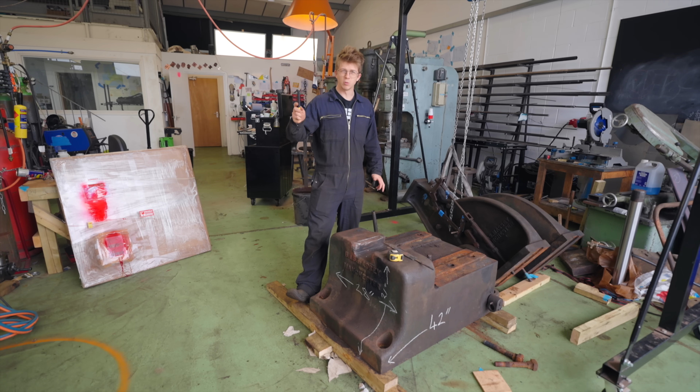Welcome back, episode 7, restoring the 1915 Massey steam hammer. In the last episode, we got it disassembled, so we can access this curious little problem that needs a lot of work on the anvil. We also received this package.

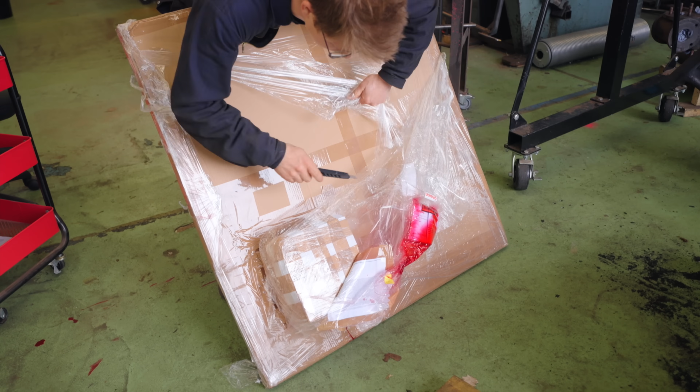Ba-bam! It's so slippery. I can't grip it to pull it up. Woo! Oh no, it's broken. This is graphite sheet. Look at that, you can just rip it apart. This is meant to be our gasket material, but who knows if it's strong enough. I need to put this somewhere safe.

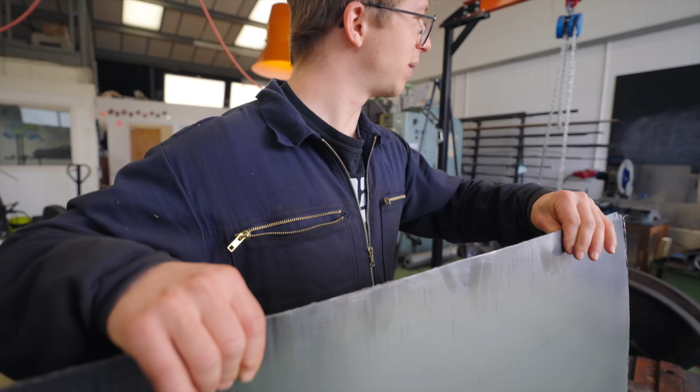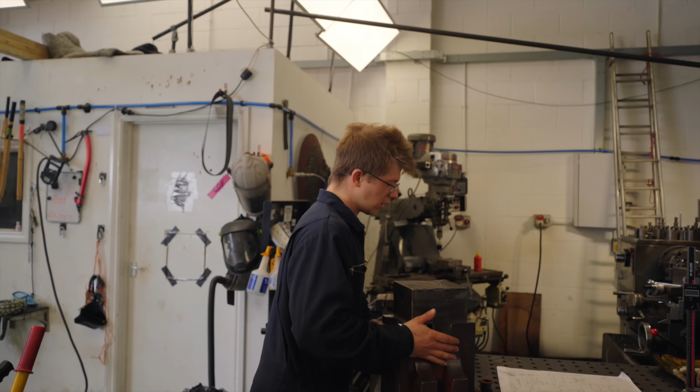The stuff that's more relevant to the last episode, however. Oh yeah. Look at that. That is 7 meters more than we need of 3/4 inch square graphite rope for the stuffing box. Oh, but we can put all that to the side because there's still work to do on our top die. So it's to the mill.

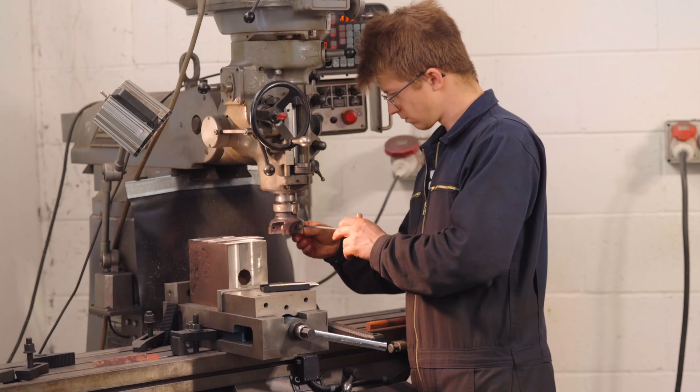That is 5 of the 6 sides of the die done. Cleaned up and made a lot neater. Now, the keen-eyed amongst you might have noticed something different about the machining on this last side. You might have noticed that everything looked a little bit less fireworky.

When I've been cutting high-carbon steel with the face mill in the Bridgeport, you have just seen showers of sparks go absolutely everywhere. Because for whatever reason, I seem to think that it was just the high-carbon steel that was making that happen, and there was nothing I could do about it. Turns out, for the first time ever, I tried experimenting with cutting at significantly slower RPMs.

Now, I'm quite certain many of you have spent many, many years screaming internally that I never tried this before, but I switched from the high gear to the low gear. I went from cutting, usually with this cutter, at about 700, 800 RPM, to cutting at 270 RPM. And the result is, we took beautiful chips that were not sparking.

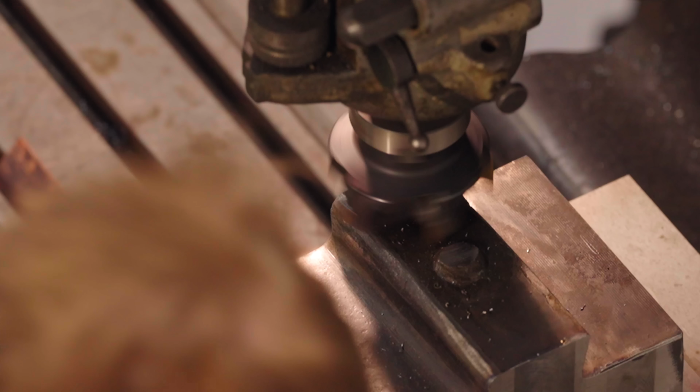The inserts on the face mill are looking in pretty good shape. The surface finish on the die is much nicer. And it didn't take any more time. I was able to take the same depth of cut, the same feed rate. All I did was just reduce the RPM, and everything was better.

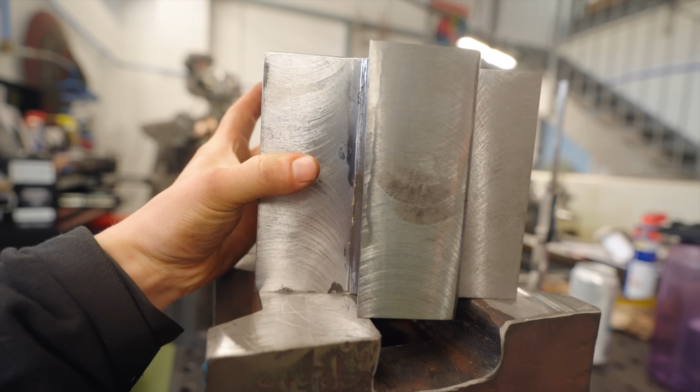Alrighty, let's have a look at what we got. As you can see, the underneath of the die has now been touched. This means that it is now square, but this is where things are about to get a little bit tricky. Unsurprisingly, adjusting anything has knock-on effects. I've made sure that we're contacting here on our freshly milled surface.

To do that, we had to take a disproportional amount of material off this face as it compares to these two faces. But you'll see we have a little radius in here, corresponding radius on the male part of the die. Well, having now adjusted things and moved things around, stuff ain't fitting. If I try and squeeze that die up against the edge, it lifts the block up. No good. This little sharp edge in there, also no good. Same deal on the other side, at least only a key has to go here.

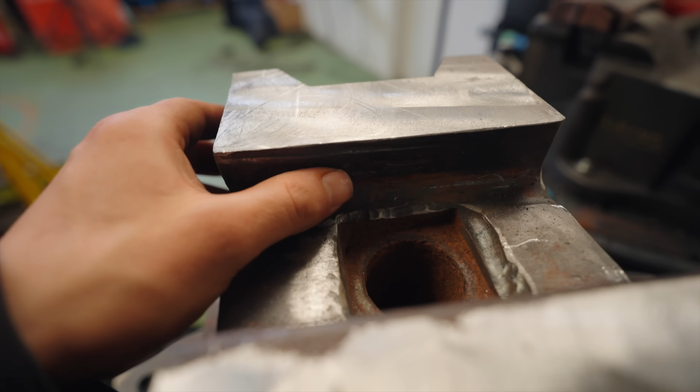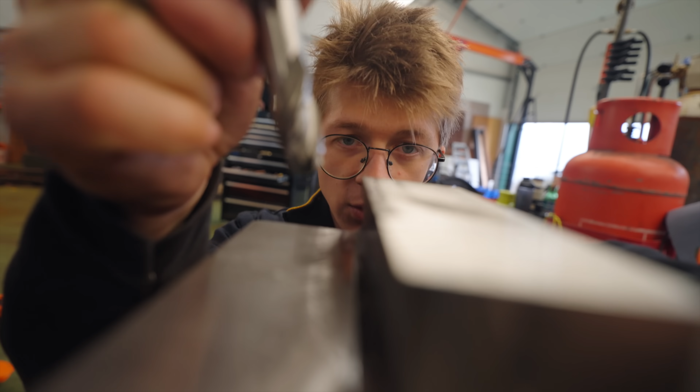Regardless, it's no good. About to sound like a broken record here, but the dovetail in the ram itself is also no bloody good. But I went ahead and preemptively ordered some end mills, some fairly chunky ball end mills, and the hope is that we can use these to recut the actual dovetails themselves. Get them, skook them.

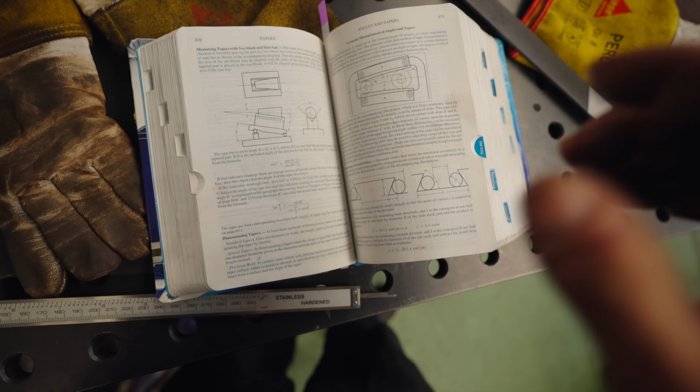Now remember, one side of our dovetail is parallel to the die block. Another side is tapered, and so this is surely going to be a wonderfully confusing situation. A number of you have suggested that I get a copy of this, Machinery's Handbook. Well, I've actually had that for like 8 or 9 years. Somebody once very kindly gave it to me. But you see, it's only helpful if you know how to read. And furthermore, the amount of detail written about dovetails, as far as I can see, is only about measuring them.

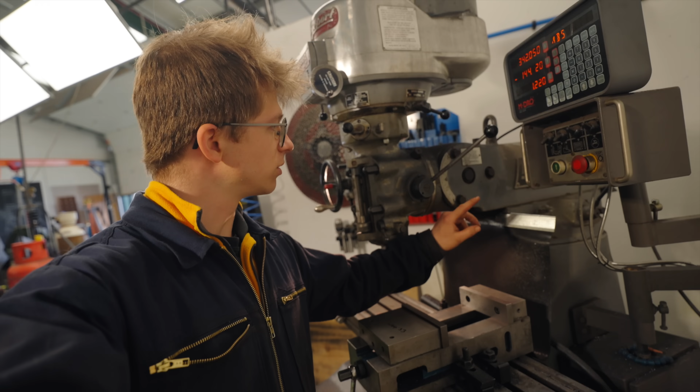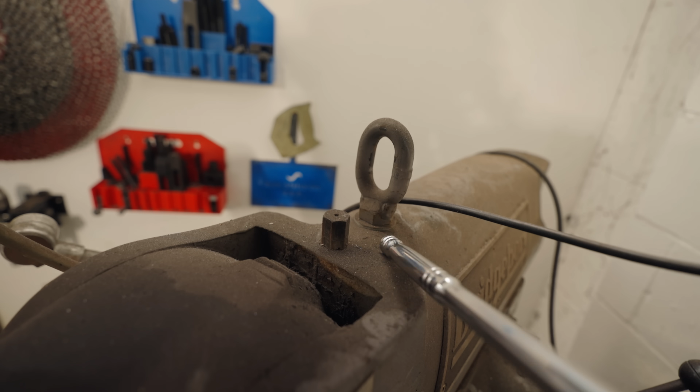But I'm at least gonna start like this. The side that's parallel, we're gonna tackle that first in the mill. And we're going to achieve our angles by nodding the head. We use these adjustment points right here, nod it up and down, and so let's see how that turns out. Wow, I did that up tight. Then back here, I got a little worm screw. I should probably be careful to not use terminology I don't exactly know. There's a thing that we twist, and we can twist that to lower the head.

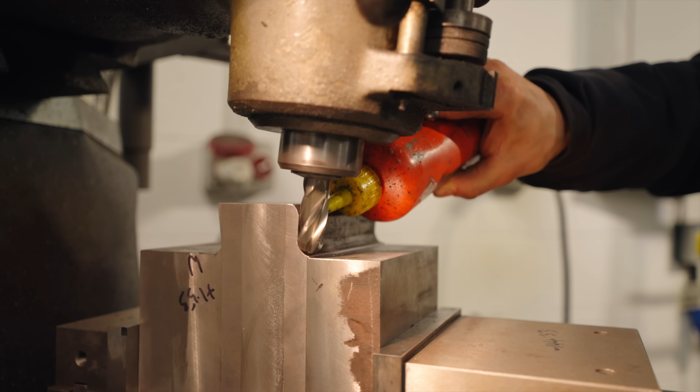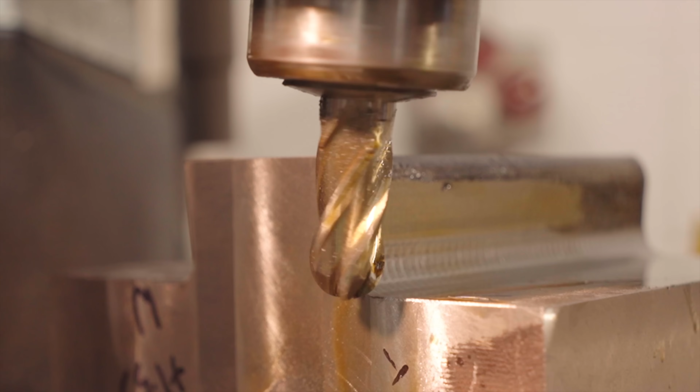I'm really hoping that this little experience teaches me a lot of useful information for when it comes to actually having to manufacture my own dies. We are definitely going to need to make the bottom die for the anvil block when we get to it. The cut is fairly central to the dovetail, which makes me feel the angle is probably pretty close. Oh yeah. That is the parallel side done.

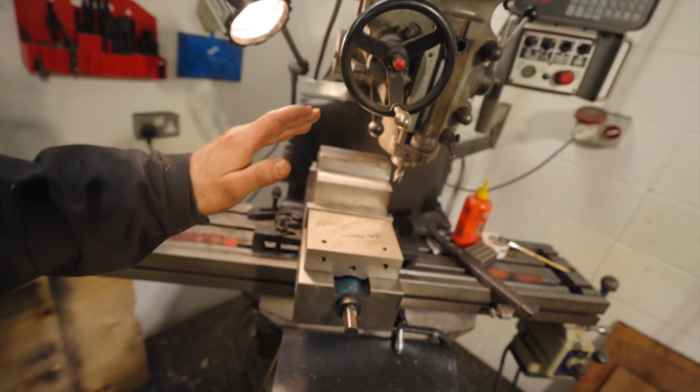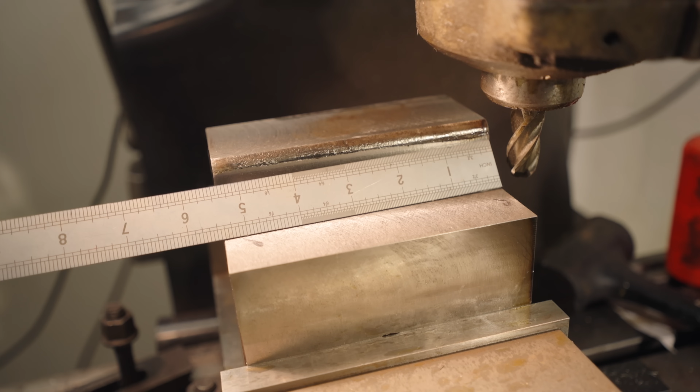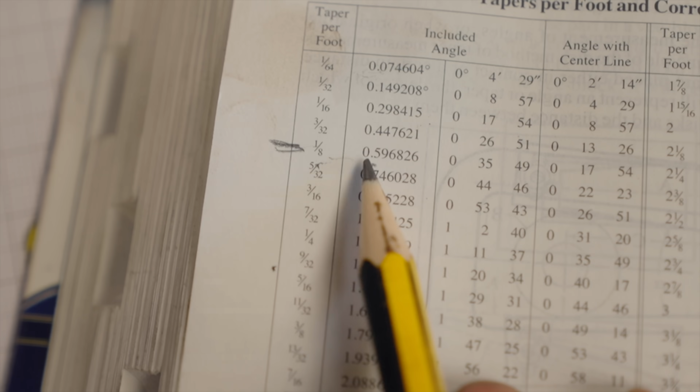Now I need to flip it, but we have to get the correct taper on it. Now what I did is I preemptively measured the offset in dimensions. So I know 1.5 millimeters over the length of this die is as much as it needs to be twisted. But check this out. I saw that the page after our little dovetail page is conveniently tapers per foot and corresponding angles. This thing's a little under 6 inches long. So multiply that by 2, 3.06 millimeters. Now what is that number close to? That is close to 1/8 of an inch. 1/8 of an inch taper per foot, about 0.6 degrees.

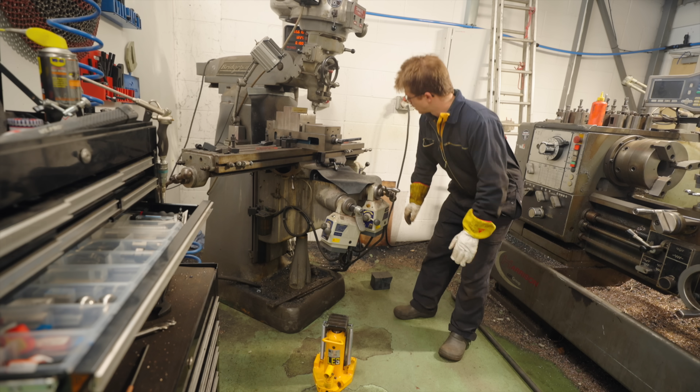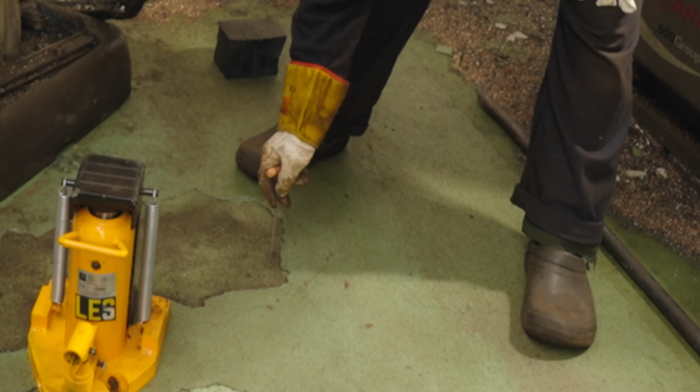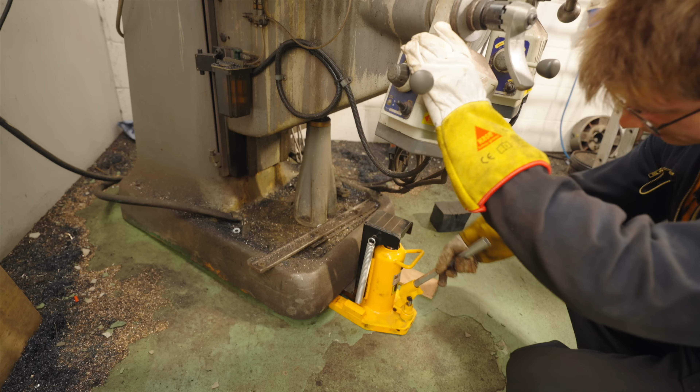I did notice something a little bit concerning earlier that I've been trying to deal with, which is this mill has a little bit of a rock to it. Yeah, look at that. The mill can wobble, not good. This concrete floor right here has like an epoxy coating and it just falls apart, like it's awful. And I'm a bit concerned with the combination of that funny floor and all the chips and crud accumulated under here to make for a not very level footing. We've got to do something about that. Whoa, it's like lifted up completely.

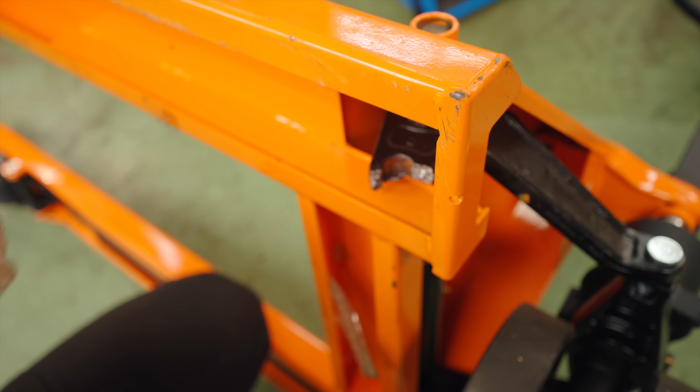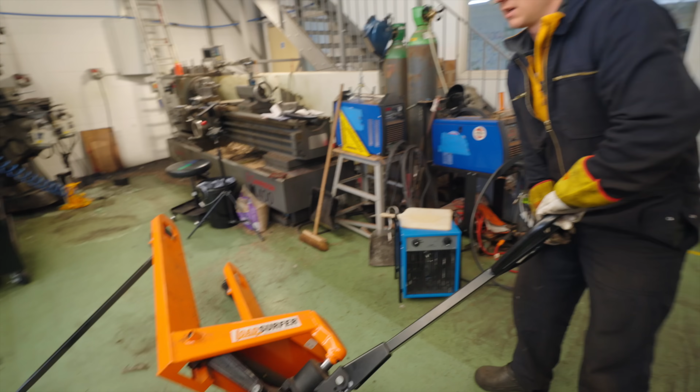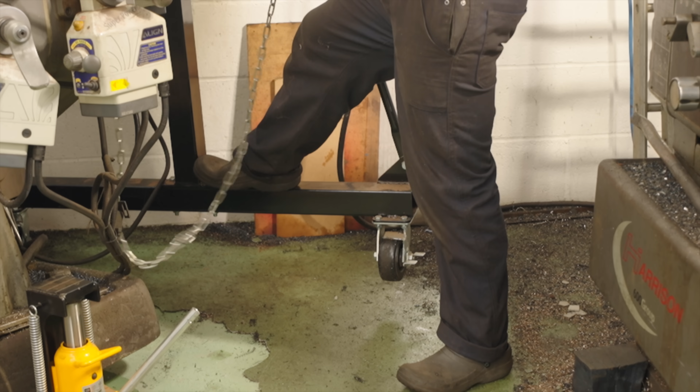What is putting 1 foot on there gonna do? Thank goodness I'm an engineer. Bro, you drove a steam engine for 1 day. You can hardly call yourself an engineer. I drove it a total of half a mile.

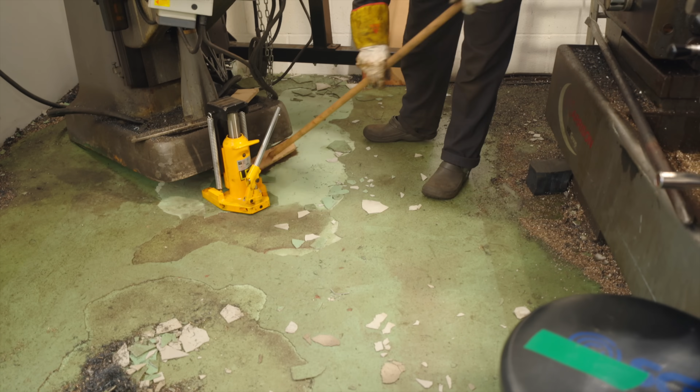Okay, I chipped out a lot, and I've hopefully got nothing else stuck under there. I'm gonna make some little wood wedges to go into the front. All right, slight tangent. Actually, you know what? Let's do this in a minute. What?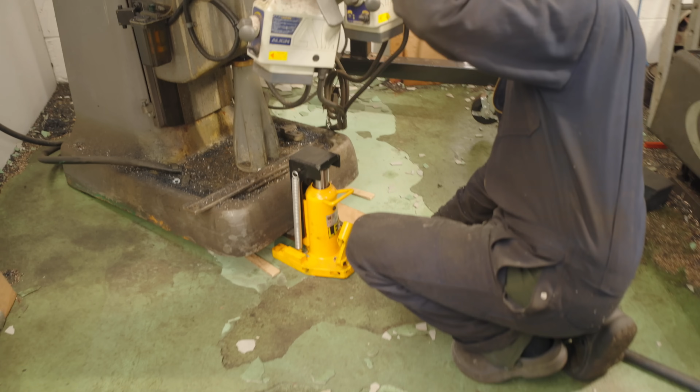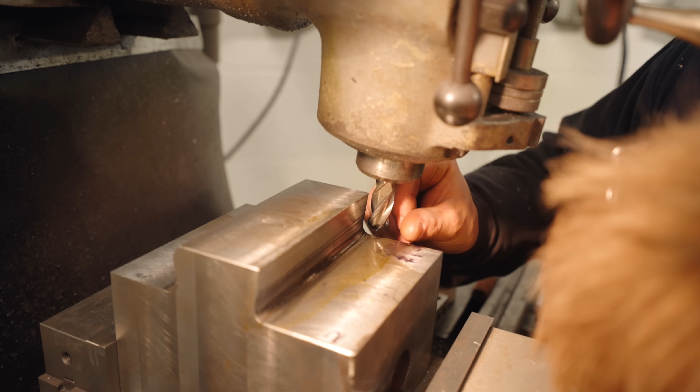Wow, that's so much more rigid than it was. Definitely won't have to stop and fix this in like 3 days' time. Ow! Oh yoy, 2 passes with the brand new cutter and it's already ruined. I think we must have hit a pocket of work-hardened steel.

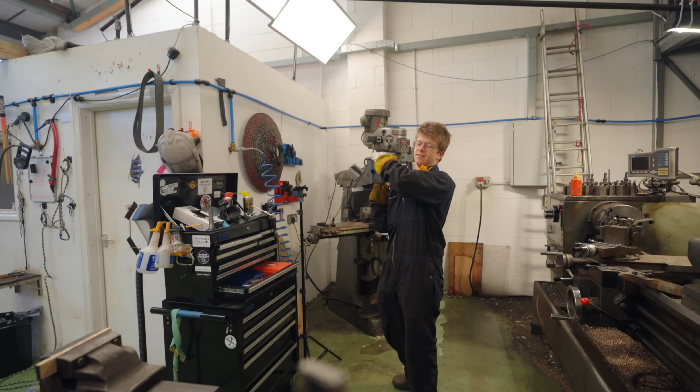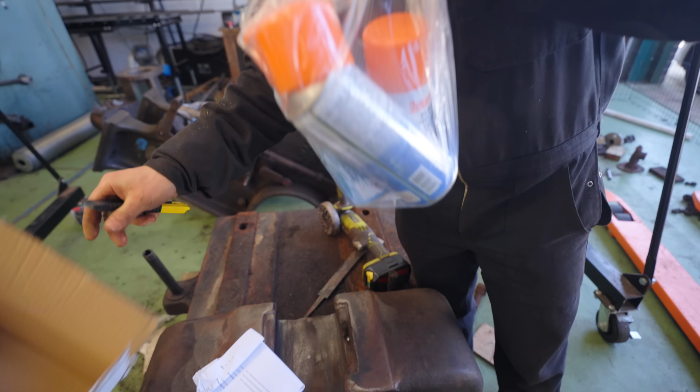It's slowly getting lighter every time we move it. This die, I think we're kind of done machining on. Question is, what do we do next? Ooh, I had a tangent to talk about. Right, time for a short tangent, and that is to find out if we've got crack. Boom! This is meant to be a crack detector.

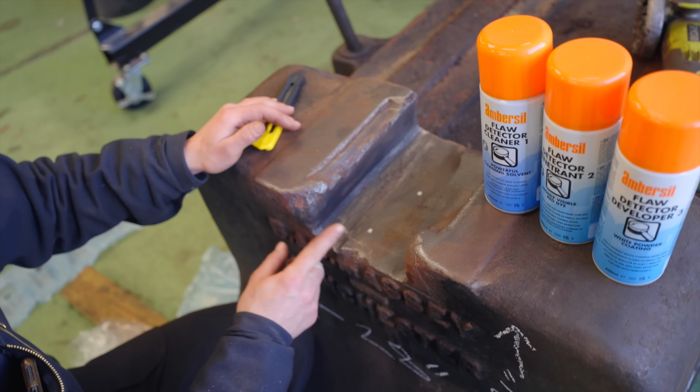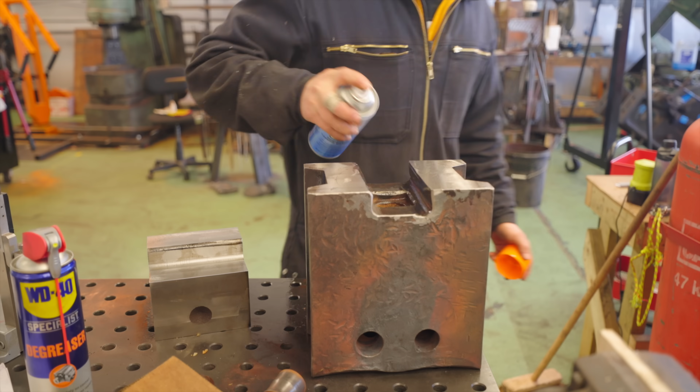John at Massey Forging recommended that I check and see if any of this stuff is cracked, because that would be really bad. And considering the abuse that this anvil has seen in its dovetail area, I think that's a pretty good shout. So let's see how it works. Flushes out soiling and leaves surfaces ready for penetrant 2 and developer 3. Something tells me this probably wanted clean metal, not like rusted, oil-infested crud, so this might be a waste of time. Flaw detector penetrant 2 penetrates defects and cracks.

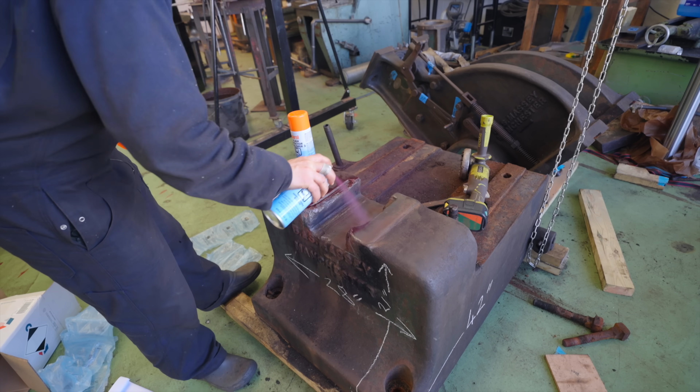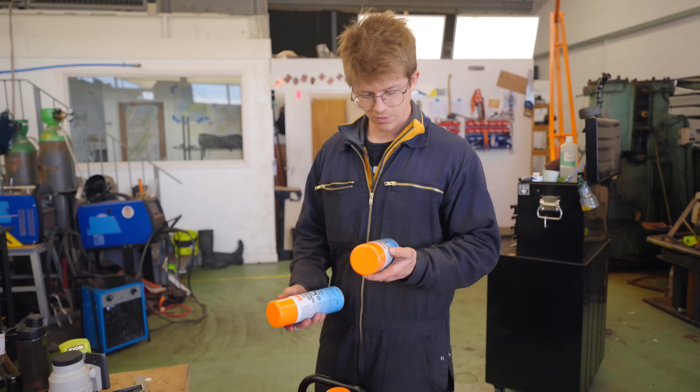Liquid penetrant applied. It needs to soak in as short as 5 minutes up to 30 or 60 minutes. We will wait some time. And then I think we use the developer, number 3. Tell you what, looking at that, it does make me think somebody's done a weld repair on this at some point. Maybe that is why we were destroying the high-speed steel end mill. Now we detect.

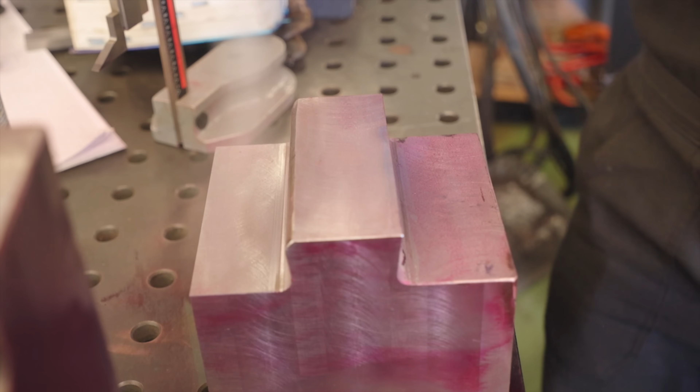I think this is meant to tell us something, but I'm not exactly sure what. I think it's meant to like highlight any remnant red. That's an exaggerated example of it. Like there's definitely red stuff stuck in there that didn't get wiped off. Oh yeah, and look, it showed that little impurity right there. Definitely works better on these milled surfaces. It looks like this handle has got the plague. I don't think I'm going to learn much until we are down to true material. So on that note, let's see what we can do about this bottom dovetail.

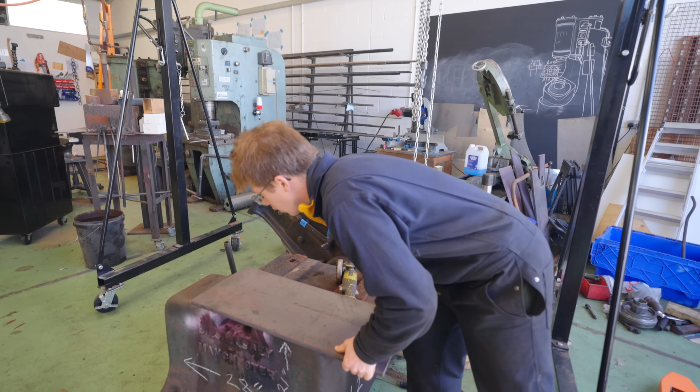So though we do have some awesome leads on this thing getting machined, there's that little part of me, that irresponsible part of me, that just thinks about how cool it would be if we were able to do it right here, with nowhere near the tools required to make this happen. I don't think it's impossible, as you guys said in the comments, and as people have reached out to me with some really good ideas on how to get this done, the impossible starts to seem just a little bit possible. Angle grinder won't go down far enough.

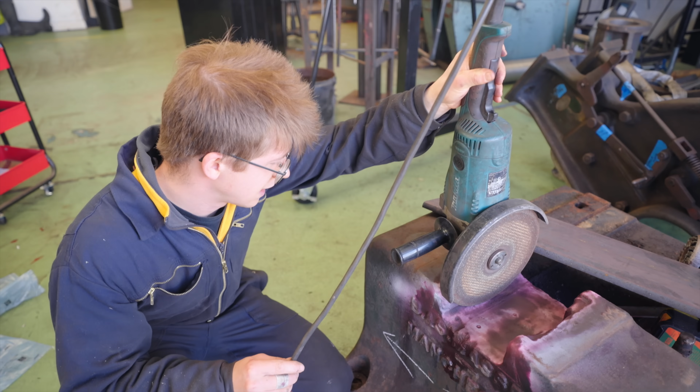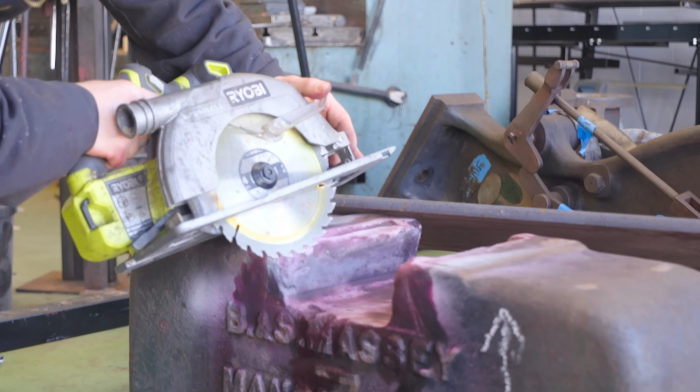It could go out this way, but then we'd have to flip everything to do the other half. That's not going to be deep enough, is it? Not with this blade. There's also a wood cutting blade. What if they had an angle grinding blade on it? Go buy a massive circular saw. Then see if we either put an angle grinding blade on it or use the components, retrofit this stuff onto an angle grinding blade. I'm gonna go buy one of these. I bought two things in case one is more suitable than the other.

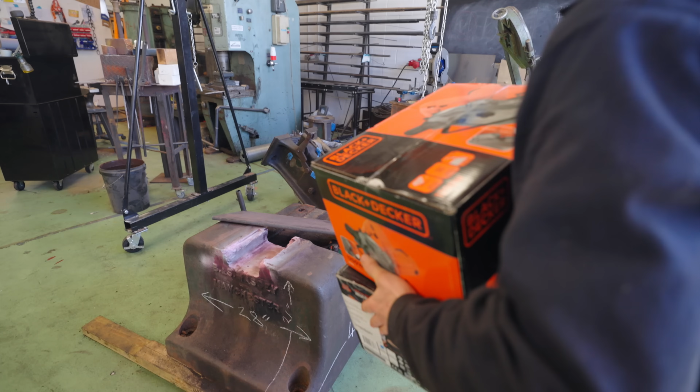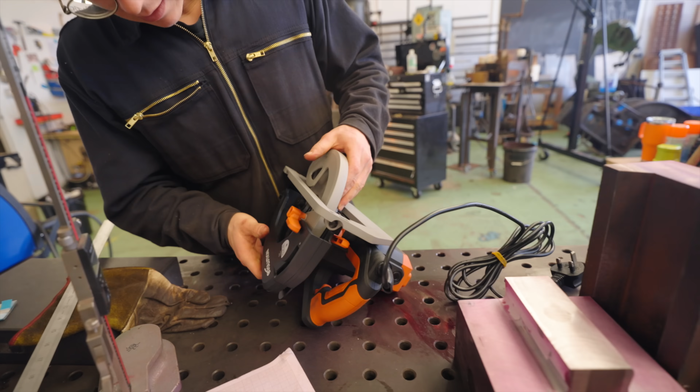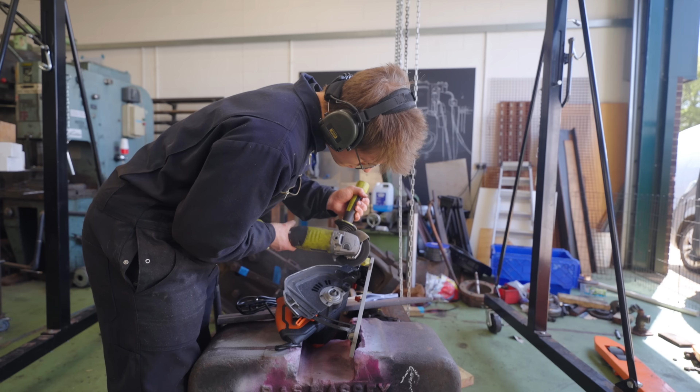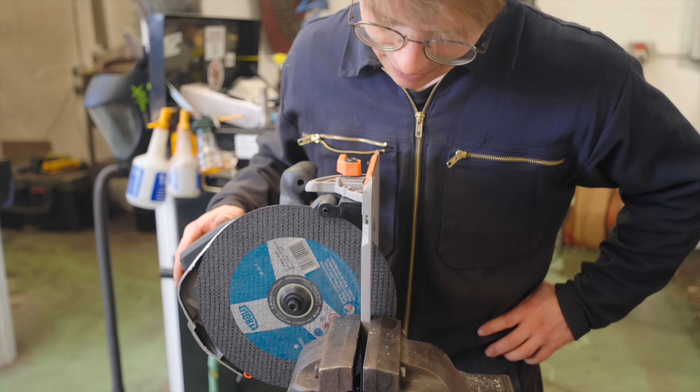Jamie, imagine how naughty. No chance. Oh, I tell you what, that does look a lot more robust though. Let's start disassembling, shall we? So close. Will it explode? I feel like horizontal, like at abdomen level, is probably not the best way, actually. I think vertically in a straight line is better. There's no way I'm using this. No chance. There was never any chance that we were going to use this. This is just ridiculous.

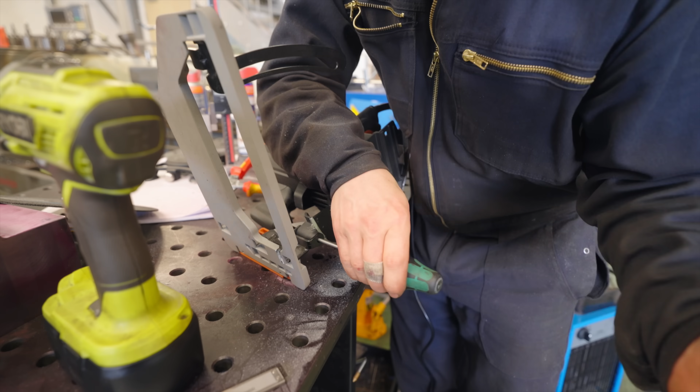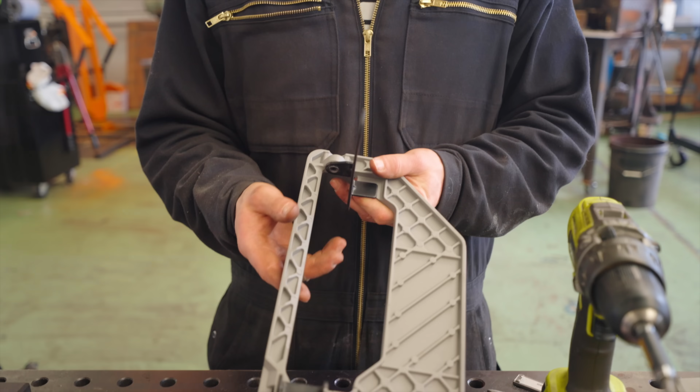Then we can just return this. I'm joking. Now, how in the heck are you going to attach that to an angle grinder? I don't have any idea, Jamie. This might have been an entire waste of time. Yeah, so this also might not work for a similar reason as the last one. So this thing ain't gonna work.

Obviously a little bit too flimsy and small, but maybe we could use it as inspiration for building a more rigid setup for planing the bottom of the dovetail flat. I have very kindly been offered the use of a very, very big machine in Manchester, which would mean that we wouldn't have to do any of this by hand. But the trouble is, in order to get this to Manchester, it needs to be driven there.

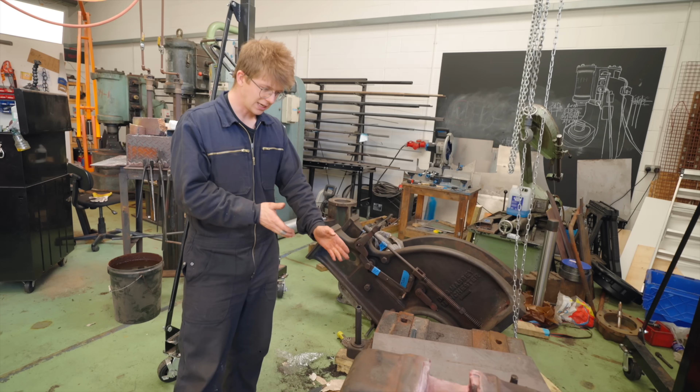And there's kind of two options with shipping heavy things. One, you ship it on a pallet, the US equivalent would be LTL, or like a pallet network company, and it's super cheap. Could be as little as £100 for a pallet to get from here to there. Option two is just like how the power hammer was delivered, an individual courier on a truck takes it there, but that's super expensive. That's more like £900 or £1,000 each way.

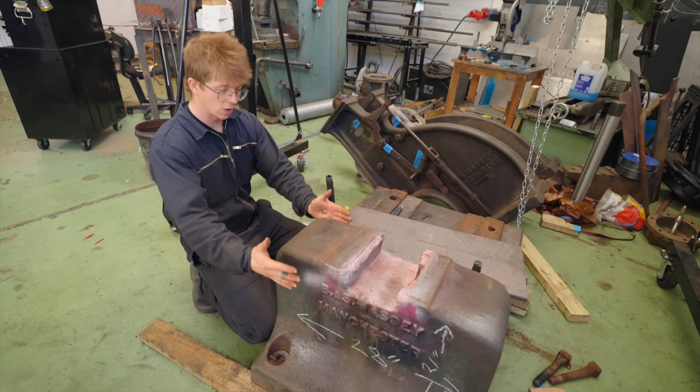I've just spent the last little while calling around. I took some proper measurements of this component, the full rectangle, and the hollows to subtract the hollows from it. And I took those measurements so that I could get an accurate weight on the thing, because these pallet networks have a maximum weight limit of either 1,000 kilos or 1,200 kilos.

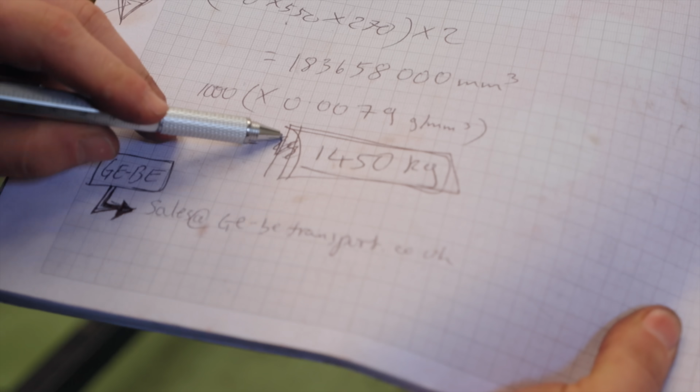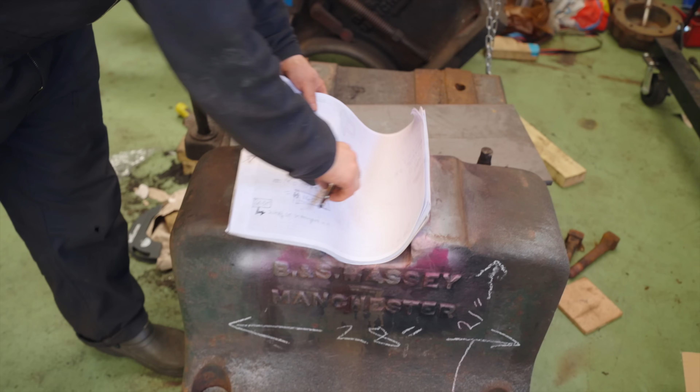And unfortunately, my mathematics tell me that this thing weighs in at 1,450 kilos, which means that I'm staring down the barrel of another 1,000 to 2,000 pounds in expense just moving this anvil to get it to a suitable machine.

So I say, though I might regret it, though I might end up saying, screw it, we're gonna spend the money, we're gonna get this thing to a proper machine, get these dovetails properly cut. I might well say that, but I at least want to give it a bloody good shot of trying to do it myself without spending the money that I might not need to spend. So I'm gonna move this thing outside and start making some dust with the angle grinder.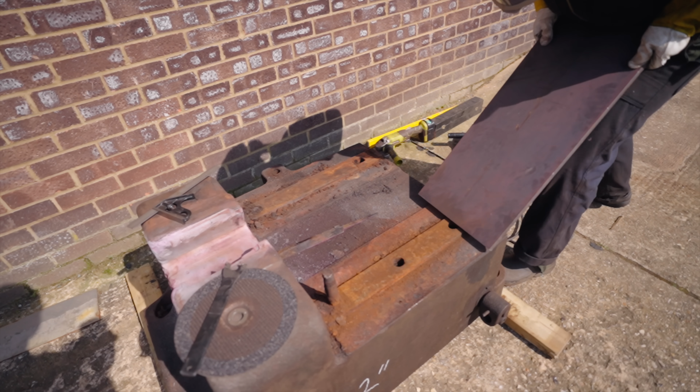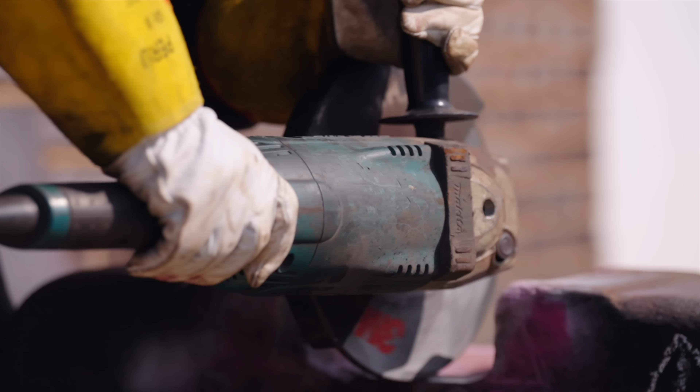Alrighty, so I have just spent a little while here with a grinding disc. You don't need to shout. This always happens whenever we do like factory tours. I just start yelling because I have the earmuffs on.

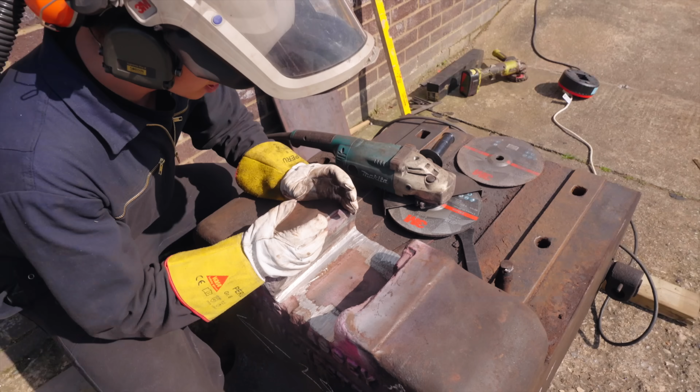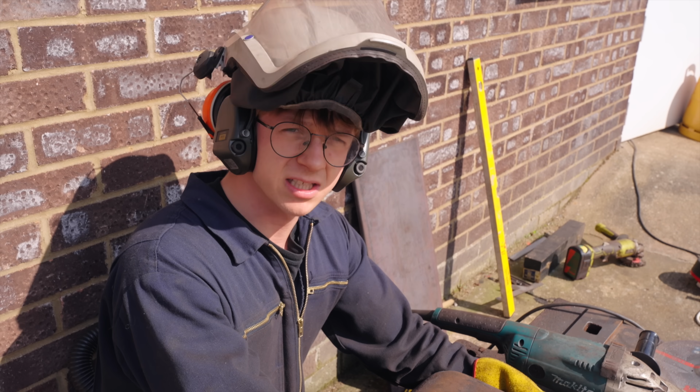I've been doing some grinding here with this regular 1/4 inch thick grinding disc on the 9-inch grinder. I ordered a cup grinding wheel. In fact, a couple of them. They've yet to arrive. But so far, what I'm noticing is that this cast iron is just delightfully soft to cut. Cuts like nobody's business, which is really good. At least we're not battling some awfully difficult material, but we are battling the tools themselves.

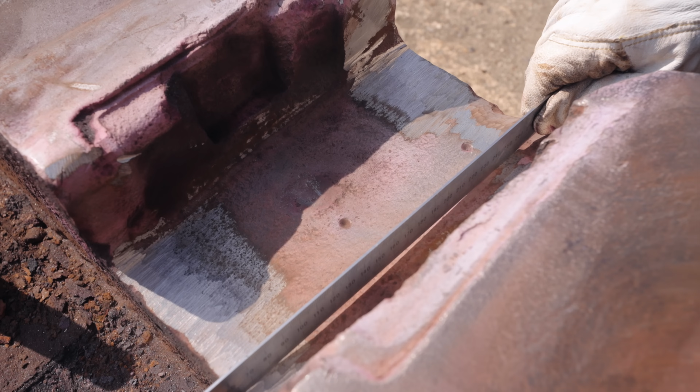Right now, the places where I need to work are pretty obvious. Here, all I gotta do is get a ruler close to being flat, and you can see we've got a lot of material to take off here and over here. So I'm just working on the ends, and I'm not even really touching these inside faces.

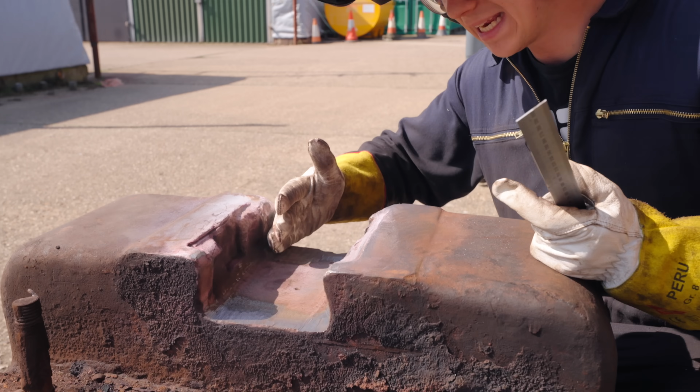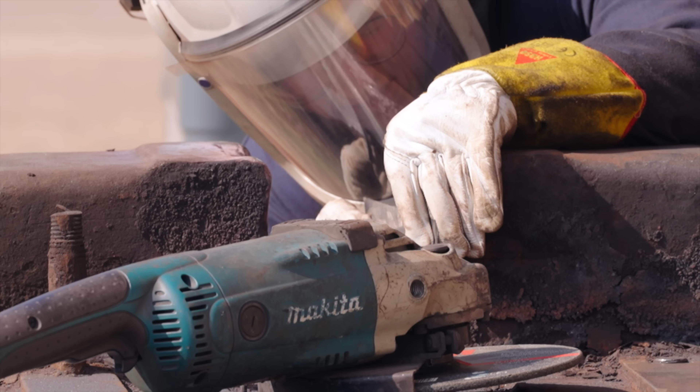My plan, if we are indeed going to just be so stupid and angle grind this to save a few quid, is that these faces get cut off. So I take that cutting disc on the 9-inch angle grinder in the future to make those angles. And then further to that, my plan is that we make ourselves a nice jig to plane this flat when we're a little bit closer. For now, let's keep grinding. Oh, you know, stuff is definitely happening and it is definitely improving.